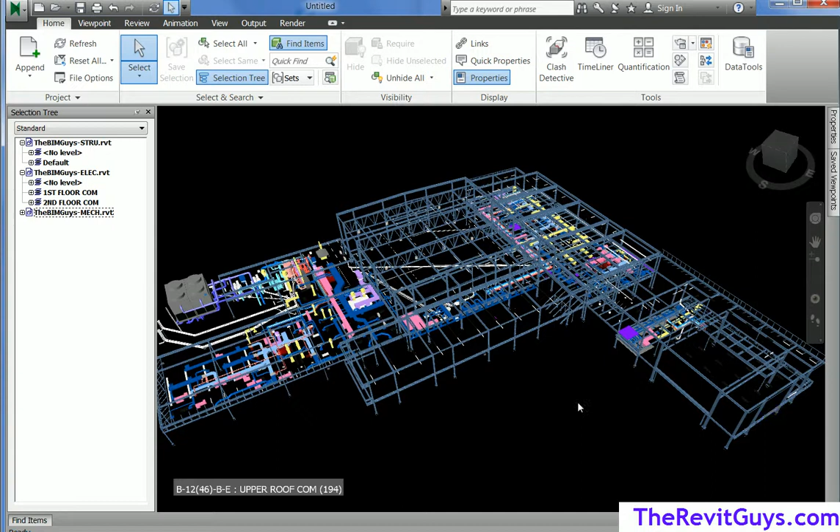At this point, there's no real defining factor for what these elements are, so what I may do is color code them to fit my needs. I'm going to use different colors than I did in the previous presentation because the other colors I picked kind of sucked, so I'm going to try a few different ones this time.

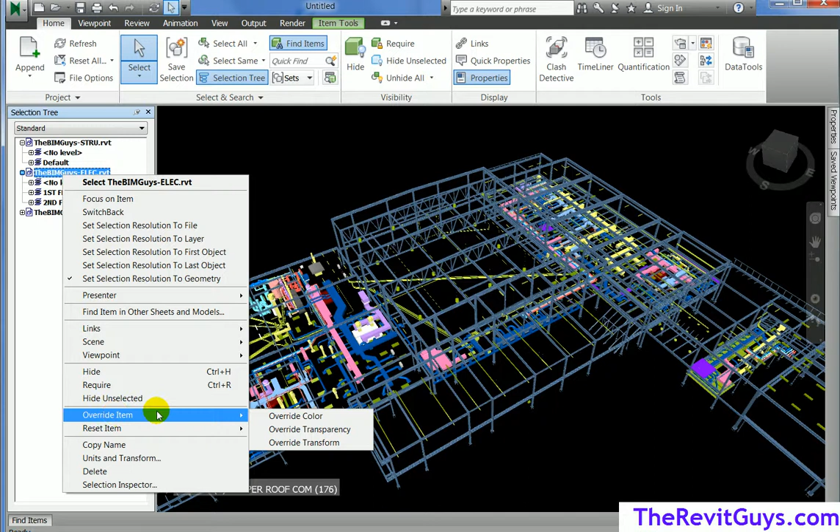Let's take the electrical. I'll highlight the electrical. You can see it all in light green right now. I'm going to right click on this and go to override items, then hit override color. I'll say all the conduit stuff, I want it to be bright yellow. I'll hit OK on that. So now all of our electrical is highlighted in bright yellow.

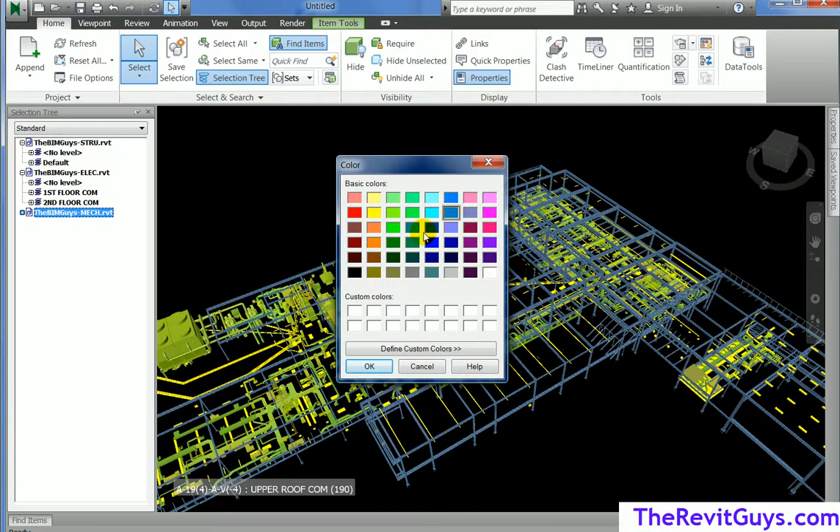Now I may want the mechanical. I'll grab that, right click, go to override items, say color, and let's make them some type of blue. That's kind of close to the other blue, I'll pick maybe a darker blue. Now we'll do purple, yeah purple. Hit OK on that, I click off of it and you'll see how it's purple, so we can visually tell the difference between the two. And my picking color kind of sucks.

Maybe we'll do mechanical, do it orange. Right click on that, override item, color, and I'll set it to orange. Hit OK on that, see how that looks. Yeah, that works for us.

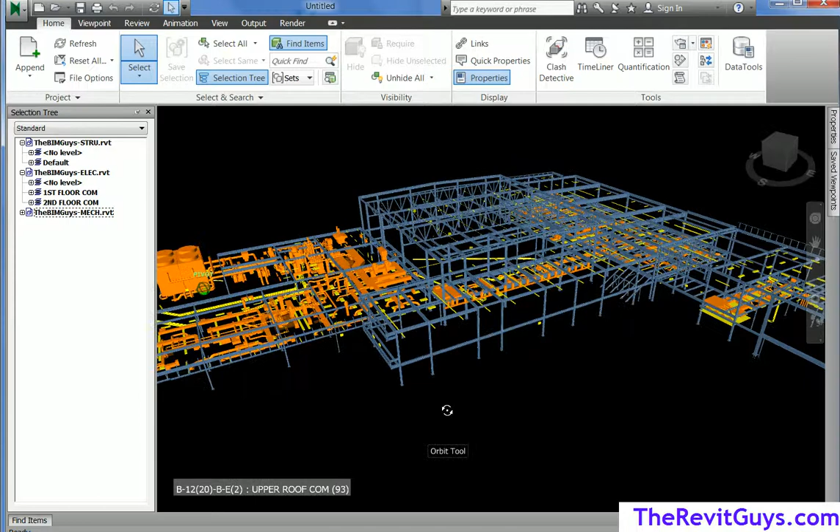So what we have is the structure, which is that kind of steel blue, we have the orange, and we have the yellow. Again, it's up to you what colors you want, but it gives me a quick visual understanding of who's who. Now, a question came up during training: what if I just want to highlight one element?

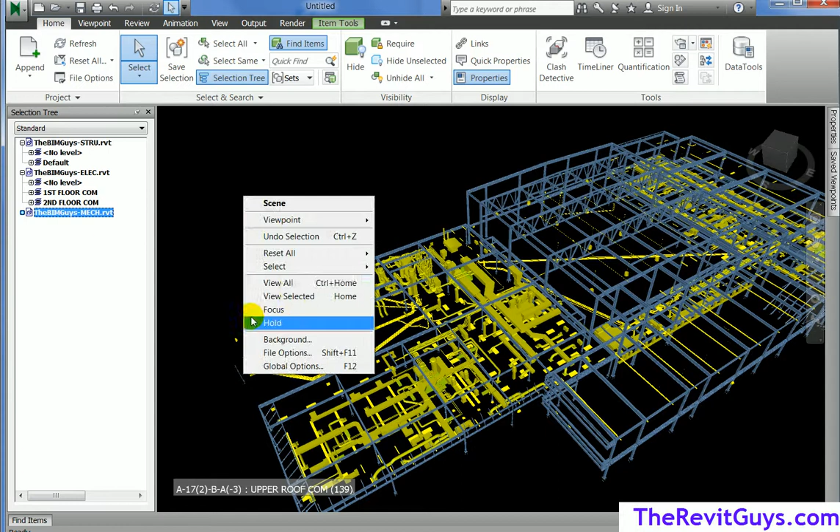You could hover over an element like so. I'm going to make sure I'm in the select tab, and I pick an element. You'll notice it picks a piece of that element. If I want to pick more, I could right click. Let's say I click on this element and right click. You can see it says to geometry, to last object, to first object, to layer. You can actually pull all the way up to file. Now when I click on it, it's only going to pick files, it's not actually picking individual elements. So depending on how you have that set, just right click on the object and I'll set geometry.

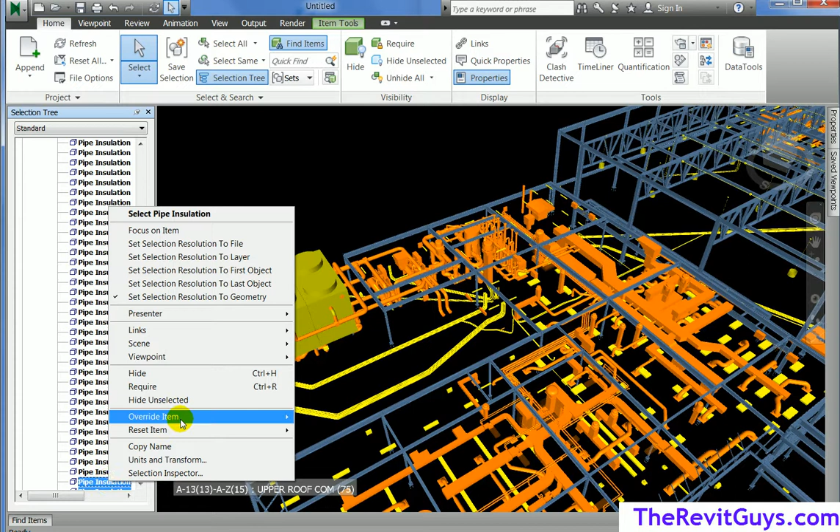Now I could take this object, notice I highlighted it, I could say I want you to be something different. If I hold the control key down, I can pick other elements just like in other applications. I'll say all of you guys, notice they're highlighted down here. I'm going to right click on it, say override the items, and say color. I'll make those all purple, hit OK, and at this point you'll see they're all purple.

So we can color code them individually, but the main objective here was to color code them so we can tell who's who. Now moving forward with this, we need to get into some clash detection.

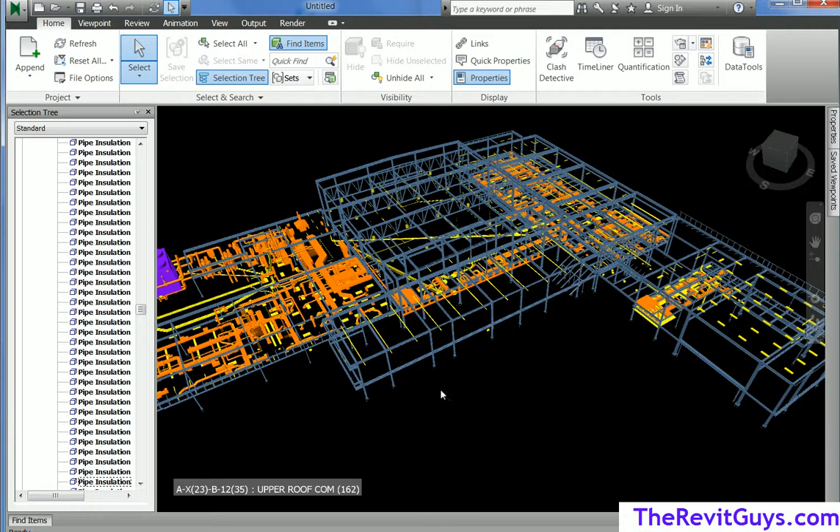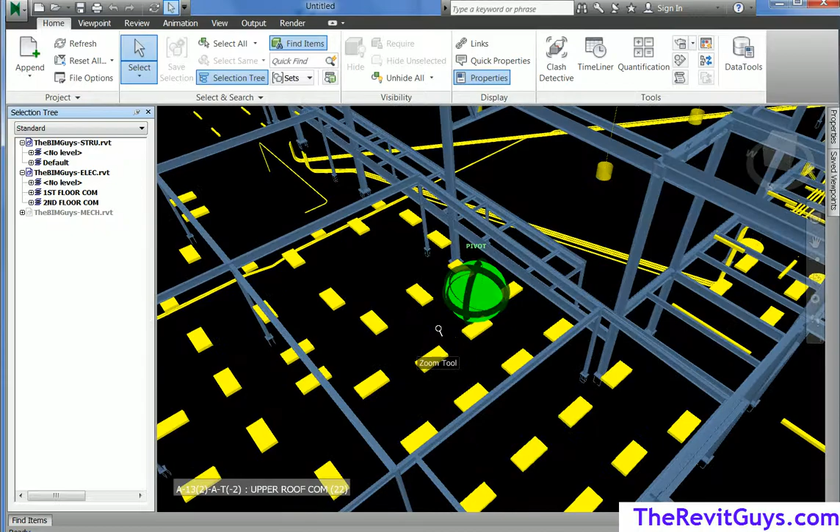So that was color coding, and also I guess I should mention turning things on and off. If I go up top, you'll notice I've got the mechanical. Let's say I don't want to see the mechanical. I could right click on here and you'll see it says hide. Instantly it's all hidden, so now all I have is steel and electrical. This gives me an easy way to look at all these things together. I could zoom in, spin around, walk around just like we talked about earlier, going down the corridors, check things out.

It's a beautiful thing. Now time to run clash detection. We go up top to the home tab, and you'll see if I go about three-quarters of the way over, you see clash detective. When I fire this up, let's go ahead and run a test. We're going to drop this down. You'll see there are no tests running.

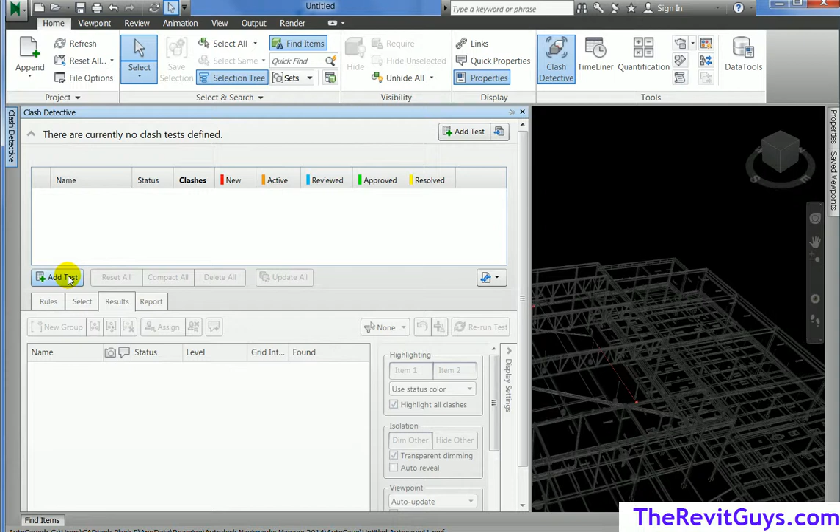So I'm going to run clash detective and add a test. Now, adding a test, we give it a name. You can hit F2 and rename it, and I'm going to call it something I understand. So this is going to be electrical versus steel. That's easy for me to understand what's going on.

So I'm going to run the whole electrical model against the whole steel model with some variations so I don't get myself in trouble. So I've created that test.

Now, once you have the test set up, we can go into some basic rules. For instance, don't pick up pipe and floor, so if a pipe goes through a floor, don't pick it up. Or a pipe goes through a beam, well maybe we want that pipe and roof, we're okay with that. So you can actually tell Navisworks what to do and not do by these settings.

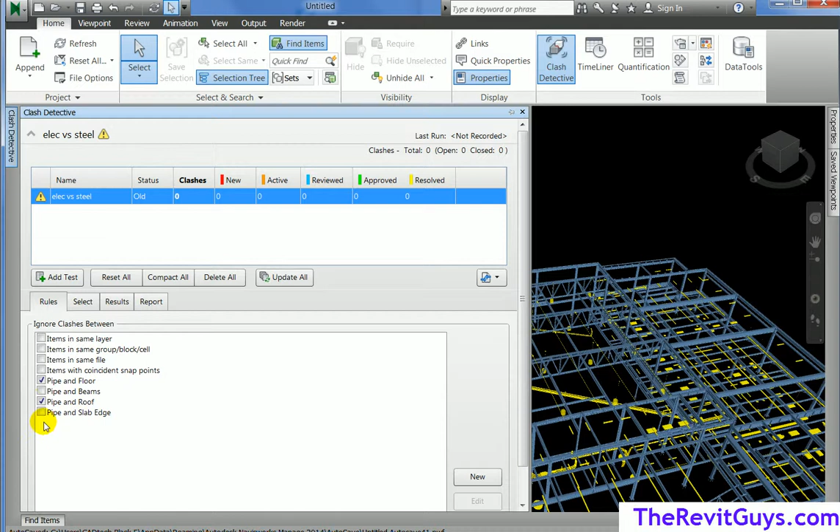Now if I come over here and hit select, this is where we really get down to the meat and potatoes. I'm going to say structural, drop this down, I want all the columns. We can minimize that with the minimize button. Hold the control key down, generic models and structural framing of that model plus the default, which is structural framing. I want all of the structural to run against my electrical.

Now sometimes in a model you may have some things that aren't really needed, like for instance I've got ceilings in here that I put in to host lights. I don't need to run that against that because it's going to cause problems. So I'm holding the control key down and highlighting the elements that I want. These can continually be changed, the test can be adjusted as needed.

So we've got this test, we're going to run the steel against the electrical. Now we hit run test. Before I hit run test, let's verify the settings here.

You'll notice that we have a hard clash. You can have a hard clearance, excuse me, a hard clash. You can have a clearance, meaning if it comes within 2 feet of these objects, it'll warn us. Or if we have duplicates, it'll tell us you have duplicates, which is a nice thing to run even on your own model to find out if you have duplicates inside of it. So I'm going to hit hard, and say anything that touches within a quarter inch, if they're overlapping a quarter inch, it will pick it up for us.

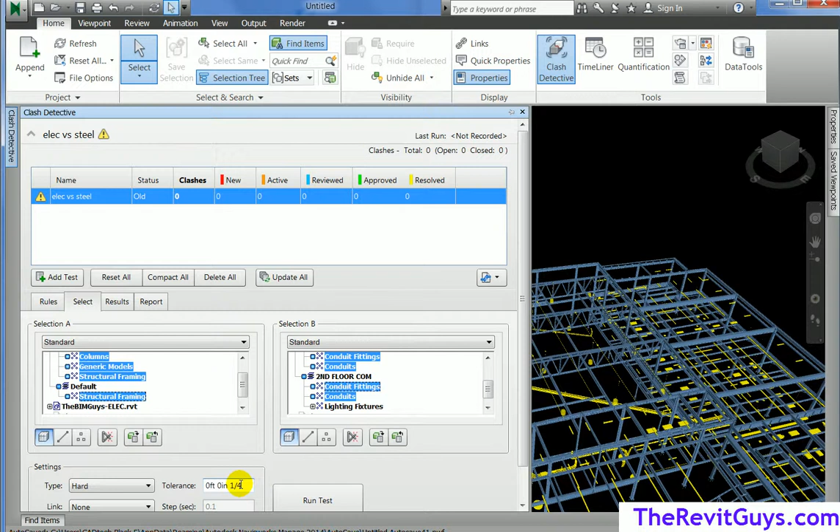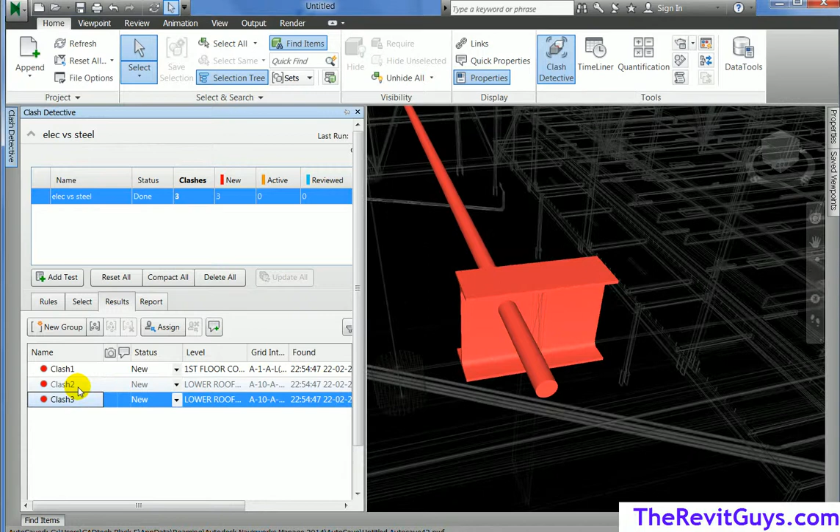Now let's hit run test and see what happens. Navisworks comes up and says, hey, I found 3 bumps or 3 clashes. As I click on them, you'll see Navisworks jumps to them. Now the screen's large here, so let me drag it on over, and you'll see it's jumping to all these different bumps. So it looks like I got 2 plates hitting, and it's the same plate. A lot of times that's what happens, so I'm hitting the same plate, it's just showing me twice, and then I have this clash over here.

Now if I have clashes that are causing me the same problem, let's say I get 16 of these and they're all in the same little area, I can grab these clashes, right click, and come over here and actually group them together. So I'm going to say conduit at roof. We may want to put a number in front of it, that way we know what it is. If I'm talking to Bob out in the field, he's going to say, what about that clash? Oh, it's 001. So we can give it a name too. So once we click off of that, now we have that.

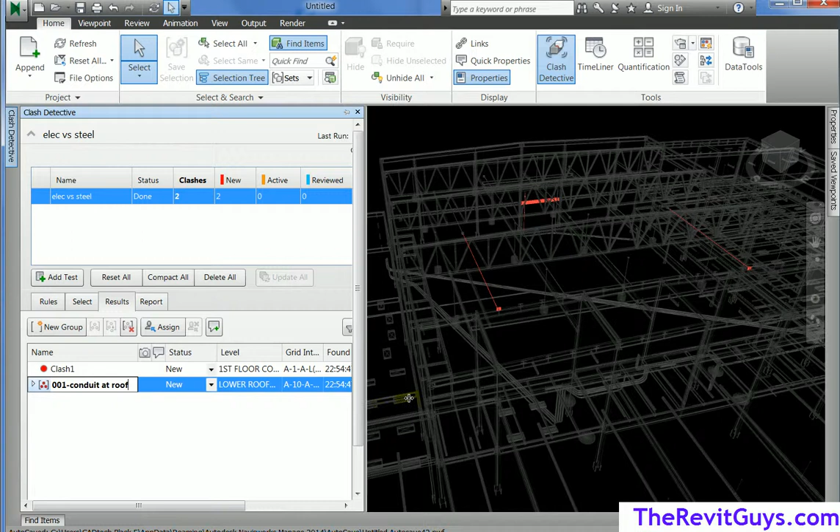So I can minimize it, and now I have what's called a group, so there's a conduit at the roof. Now if I click on it, it'll show it to me. Now let's take it a little bit further. If I come over here and say use status color, use item colors, you'll see how they actually have changed color a little bit, and I can see which ones from what group. Now I'm going to zoom in on that over there, and you'll see that I click okay, then I zoom in, I can see where my problem is. So I've got this problem here I need to rectify.

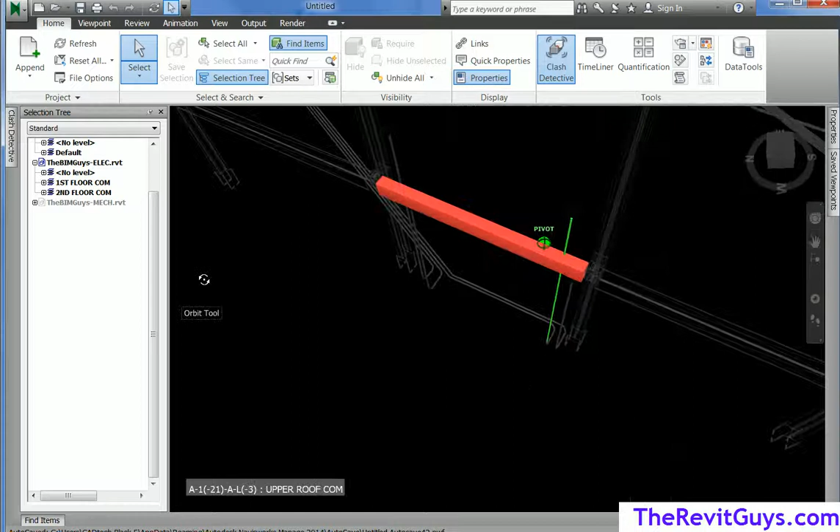So we found the problem using clash detection, and what we'll do in the next video is open up Revit, fix the problem, reload the file, and see how it fixes it. So that is how we run clash detection.

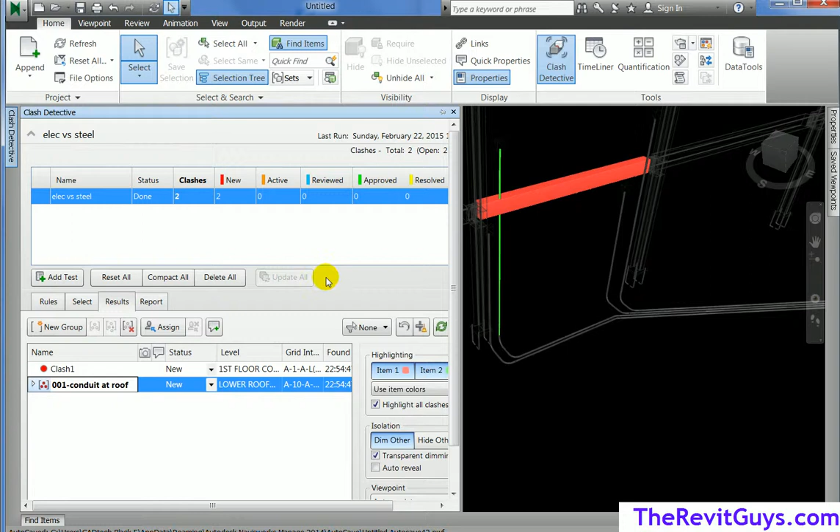Now just a couple of little tidbits here. You can run lots and lots of these. Once you run them, you can also add notes. As I come down here and open this up, let's say for instance Ryan is going to fix this, we can say who did it, who wants to work on it. If I had more screen, you can actually see here, it would give you the ability on who's going to work on it, etc. Assign. So we can assign it to Ryan, and I hit OK on that.

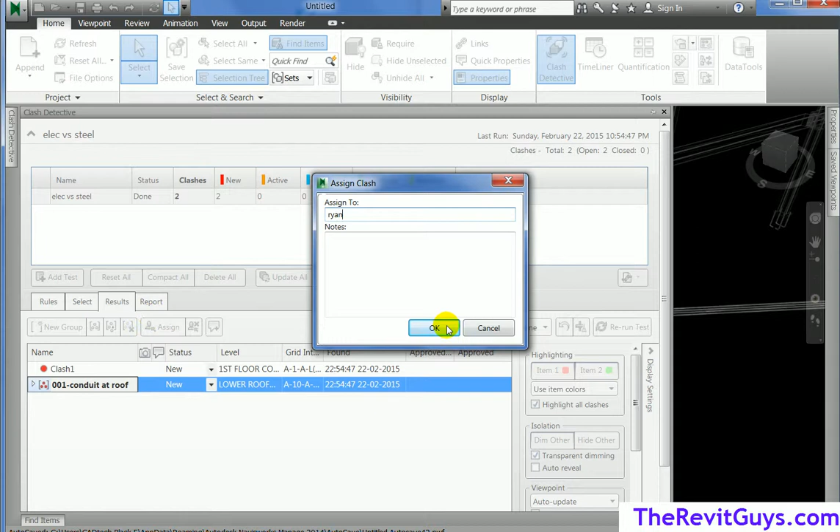So Ryan's going to take care of that. I can't get to the bottom of my screen right here, maybe I can, yeah there we go. And we can come on over, you see it's assigned to Ryan. It'll tell you how much it's bumped into. At any point in time you want to rerun the test, you can, it'll run through it again, tell you where the problems are. You'll notice that the clash didn't hit new anymore, now it moved into the active range. We could also review it, approve it, and once it's resolved, it'll actually pick itself up.

So we're going to now end this video, and we'll come back and fix it in Revit.